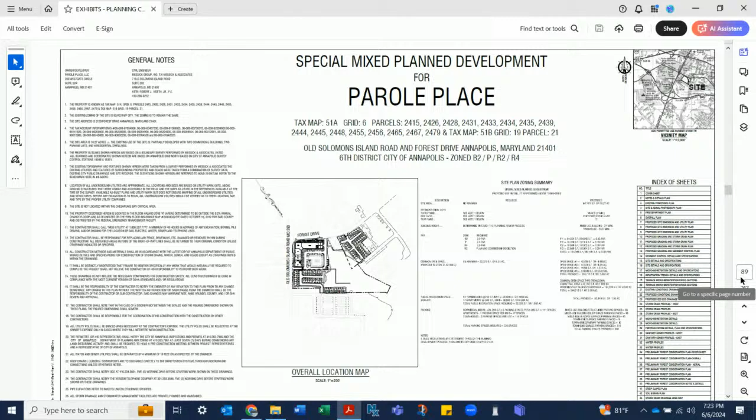I am. Okay, what we have up here is the cover sheet. Why don't you clarify for everyone the total acreage, what's being disturbed, what's left undisturbed, zoning and all of that. I brought some copies so I can read them because I can't read that.

All right, so total acreage of the site is 10.27 acres. We're saving a significant portion of that property. Open space will be over 5.6 acres. Recreation area will exceed the requirement. What's being saved is, one second...

There are 3.19 acres of forest conservation. In one area, there's a reforestation of 0.012 acres that will be saved. On the site, there are 73 existing significant trees. We're clearing 15 and saving the rest. The majority of the trees are either dead, in poor condition, or in fair condition. All the good trees are being saved.

And we'll get into this, but all of our forest conservation is on site, correct? That's correct. Okay, I'm sorry, I'm not hearing all of that. Could you repeat what you said?

There are 73 significant trees on the site. We're removing 15 — actually 14, I think. 14? Okay, 14. All of the trees being removed are either dead, in poor condition, or fair condition. All the good condition trees are being saved. Good? Okay.

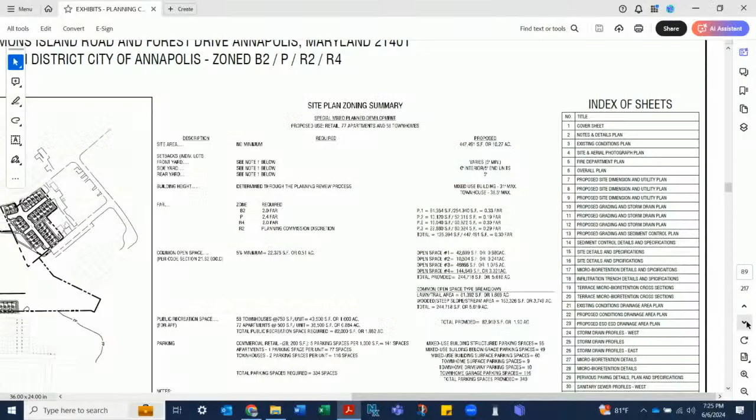I'm good. Can you jump to the aerial view? I think it's sheet 3 or 4. Yeah, there you go. Zoom out a little bit.

So this is an image we put together to show the context of the proposed uses and development on the existing aerial map. You'll see that in the center of the site there's a large blank area — that's the area being saved for forest conservation. That's also the area where we're doing the significant outfall improvement, which I'll get into in a minute.

I think I'm hard of hearing, could you just speak up a little bit? Yeah, thanks. That area is also where we're doing that significant outfall improvement you heard of earlier, but I'll get to the details of that in a minute. Got it, you said significant outfall improvement. Significant outfall improvements. Gotcha, yeah. Thank you.

On the corner of Forest Drive and Old Solomons Island Road, there's a 29,000 square foot commercial mixed-use building, with first floor retail and 77 apartments above it. Behind that, there's a parking court and a parking deck. There are also some areas in the back for gathering and entertainment, shown as hatched areas behind the commercial building.

South of that, along Old Solomons Island Road, we have townhouses fronting on a public street we're creating, which will connect Old Solomons Island Road to Neal Farm Drive as well as to Forest Drive. That's the area Mr. Hyatt is showing you now — townhouses located along a public street. The public street will end pretty much where Mr. Hyatt's cursor is, at the last end of the townhouses. The rest of the roadways on this property will be private, intended for access to the mixed-use facility.

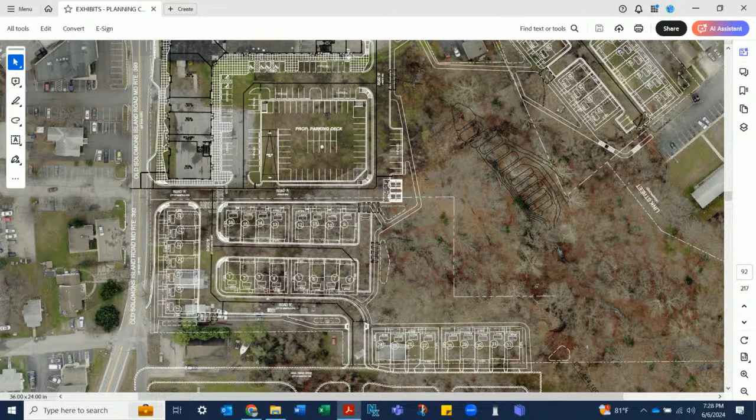On the other side of the stream, if you can move over, Stephen. You can see there's a separate entrance there off of Forest Drive with townhouse units. Those roads are all private.

If you look at the double lines running between the two, that's the pathway system you'll hear more about from Mr. Crabtree, which Mr. Hyatt spoke of earlier. A pretty significant pathway system, intended for pedestrian connection between the Allen Apartments, if we can get the right of way, the eastern side of the site, the western side, Forest Drive, Old Solomon's Island Road, and Neal Farm Drive—trying to interconnect all the communities with a pedestrian pathway.

Along Forest Drive, there's an existing storm drain right at our entrance that we're reconfiguring and rebuilding.

In essence, we're rebuilding that storm drain to drain Forest Drive, which will then drain down into the outfall improvement I discussed earlier. The outfall is right here—that's the step pool conveyance system. It's coming from Forest Drive.

Actually, it's collecting all the stormwater from the entire site as well as Forest Drive. We've designed this as really a regional facility. It's providing stormwater treatment not only for this site, but everything that drains to it, including the site between the east and west sections of this development, as well as everything that drains to Forest Drive. If you're familiar with Forest Drive, that's a low point, so all the commercial across the street drains to it too, and we're providing a significant improvement there.

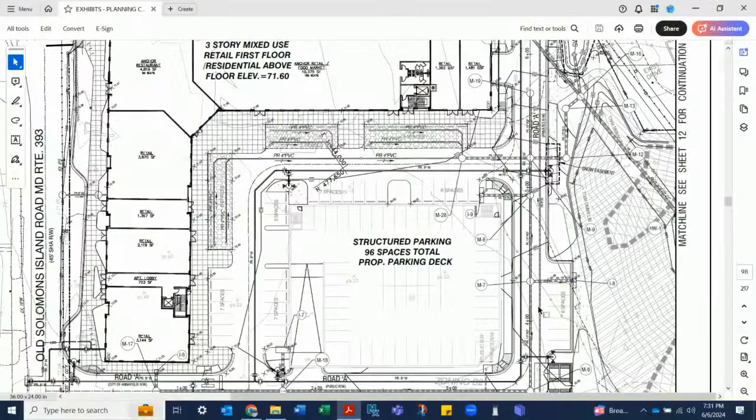Go to sheet 101. This sheet shows the step pool conveyance system better than the aerial did.

You can see the step pools coming down into the existing ravine. Today, where the outfall of that existing storm drain from Forest Drive dumps out, there's a significant head cut in this stream—right there, come down to the first pool. So right there today there's a significant head cut, which is erosion in the stream from the upland that drained through there. The storm drain itself is in somewhat disrepair, so we're replacing the entire system.

We've intentionally placed a large pool there to settle water and allow sediments to settle out. You can also see that the storm drain from the eastern part of the development comes into the same pool. From there, stormwater will convey down the hill through each pool, each pool being basically a 1-foot vertical drop with a stilling basin for each one. It's literally a babbling brook, if you will, when you get this thing finished.

The gray shaded area in the middle is what's called a cascade—that's a grade control structure, because we didn't have enough pools to make a 1-foot vertical difference from top to bottom without continuing to go down and disturb the wetlands, so we didn't want to do that. We put a grade control structure called a cascade, basically a 5-foot drop between two pools, filled with natural stone to allow the water to cascade down that hill. Again, each pool is a 1-foot vertical drop.

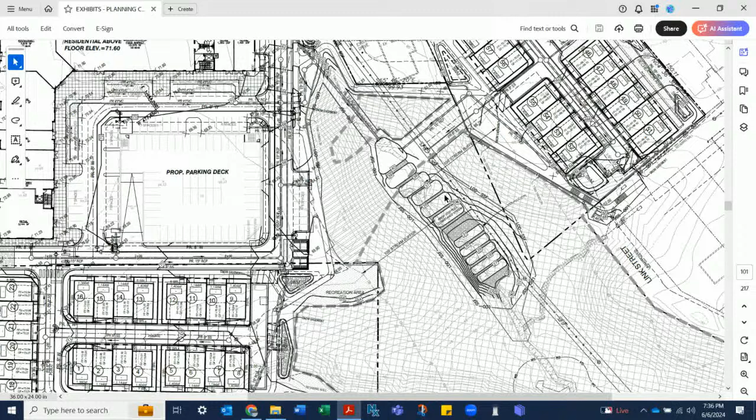Okay, so to continue with the stormwater management - that's the regional facility that's basically improving and stabilizing the outfall. Within the pods of the development itself, there are also micro-bioretention facilities scattered throughout to provide the environmental site design volume required by the state. So the ESD volume is completed up in the upland portion of the site, and the outfall improvement is down below. There's also an infiltration device behind the mixed-use building for roof leader infiltration to limit the amount of water that goes down to the stream.

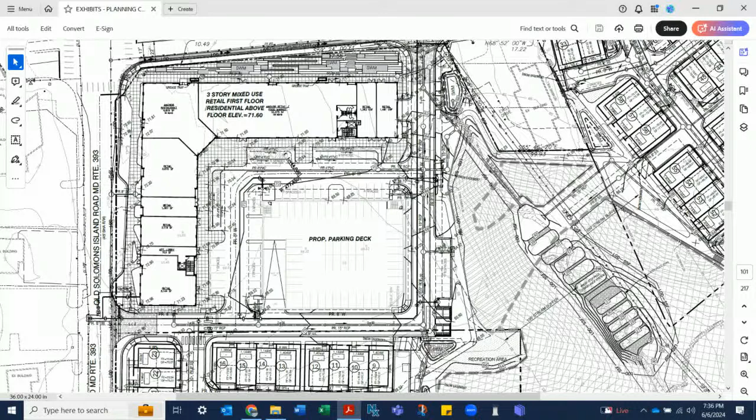I want to show the microbioretentions - I have those on the terrace as well. Also on the terrace, on the front - can you zoom in at all? Okay, that's the sheet I wanted. There you go. There's gray shaded areas on the front terrace, which is really an interesting feature, which I'm sure Mr. Wilson will get into. There are stormwater management devices there to treat roof runoff as well as patio runoff on the front of the building.

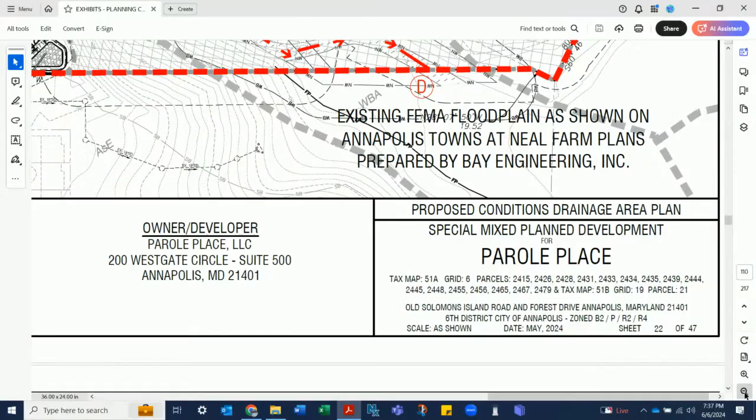Are they just bioretention ponds or planters filled with native species? There are several stormwater BMPs, and I'm wondering what kind - are they bioretention? So on the terrace, they're more like urban planters, yes, stormwater planters. The others are bioponds. There's also one infiltration device - after the water is cleaned and water quality is improved, it's put in the ground.

All right, so then I have the plat here. We still have - let's come back to the plat. Okay, what do you think about that? That's fine, okay.

Let's talk about the design generally. You've alluded to all of the stormwater - we've concentrated development along the corners here and the already developed areas, but can you verify that this design minimizes impacts to the property and that we've achieved, we'll call it, maximum natural resource protection?

It does. Can you go back to the aerial view? Sure. Which one was that? 98, 94?

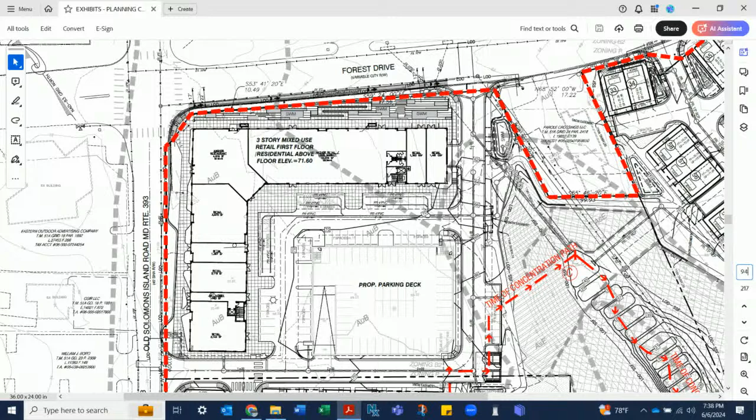Bear with me. That was... It's going to be earlier in the set. It's like sheet 4 of the set. There you go, right there.

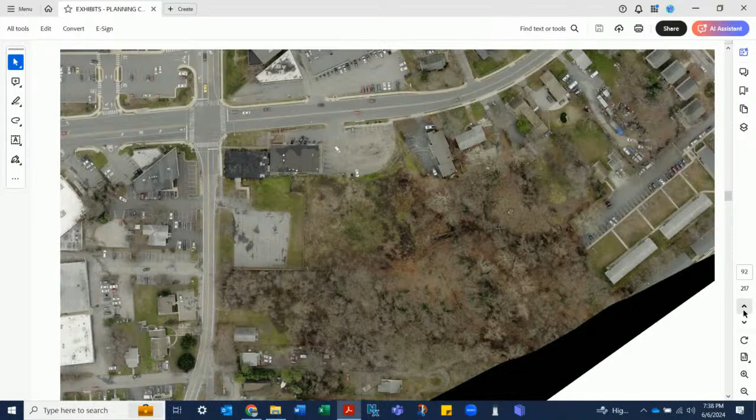So you can see on this photo that the areas with no white overlay are all preserved. In essence, all the steep slopes, all the stream buffers, all the stream areas, and the wetlands at the base of the hill have all been preserved.

Generally, to give you a synopsis of how we designed this facility, we took what was previously developed, what was clearly cleared, and worked within it as best we could. There's one small area at the fire T that was talked about earlier where we are pushing back the edge, but with the invasives over these past 7 years, that forest has pretty much died. The invasives have pulled it down.

In essence, we're working within what was previously at one time cleared, everything outside of steep slopes and outside of steep slope buffers. So all the treed area you see in the middle is all the steep slopes, stream buffers, wetlands, and everything else we've worked with.

That was created through a collaborative effort between us and the Office of Planning and Zoning, Tom Smith, through a number of meetings, as well as the meeting with you all back in 2022. So we think we've worked very well together to limit the amount of development that's intrusive into anything that would be considered an environmental benefit. And we think what we're providing with stormwater is a significant environmental benefit for the community.

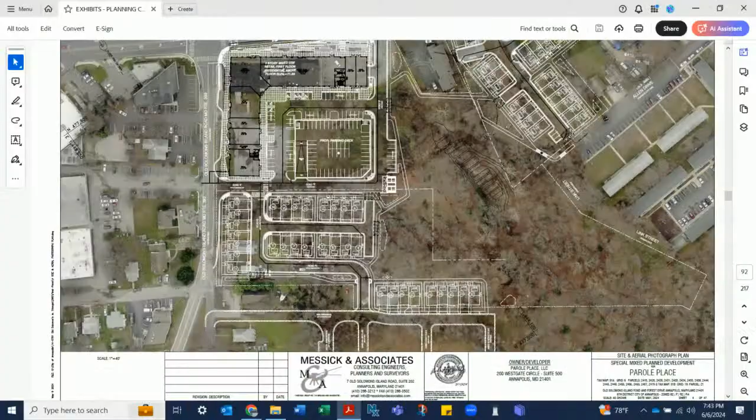Behind the mixed-use building, that large paver patio area would be used for gathering space and community events. We've talked about having events there as well. On the eastern pod, you can see the large area between the townhouses and the ravine - that would be community open space, as well as open space behind the townhouses. So we tried to intersperse community open space and open area for recreation throughout the development to make it convenient for the residents.

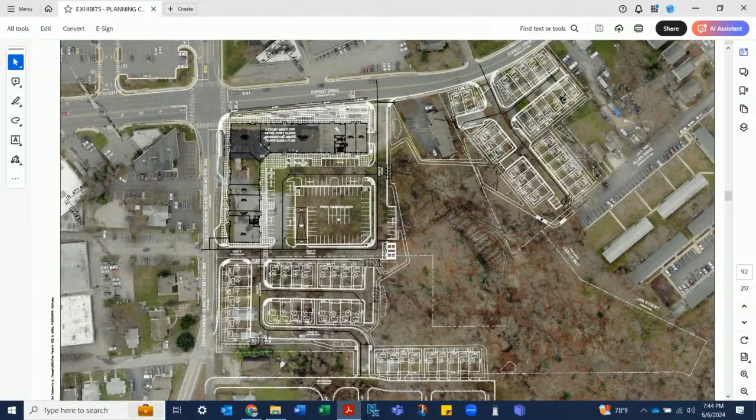So in your calculations for recreation open space, you don't use any of the forested area in that calculation? I remember reading that if you include that, you way exceed it. But the part in your calculation that's actually usable for people to sit and walk their dogs or do whatever - that space alone meets the requirement for APF. It does, that's correct. Yeah, anything that's in the recreational space is actually usable space.

So it doesn't exceed the slope or anything like that. You can go throw a Frisbee, kick a ball, have a picnic - that's the kind of space we're providing.

Could you say that again? I couldn't hear the end of that. The recreational space isn't going to be sloped - it's all usable. None of it is sloped in a way that you couldn't actually use it. You could sit there and kick a ball, throw a Frisbee, or have a picnic if you wanted to.

So, and it's not in the conservation easement? That's correct. None of it is, no.

Let's talk about trees. We're going to remove a few, as you mentioned, and we'll get into the specifics on that with Mr. Klobasco and Mr. Arison in a bit. But let's talk about the number of trees, the locations, and also street trees - we've got quite a few of those.

Go to the next page. So the dots on the page are obviously the trees. Green means good tree, yellow means fair tree, red means dead or dying or poor. You can see where they're dispersed throughout the community.

As I testified earlier, the ones that are coming out are either yellow or red. That was intentional, to save the good trees as well as the environmental areas around them. So the 14 trees that we're removing are the ones you see within the development area that are either yellow or red - that are shown on that plan.

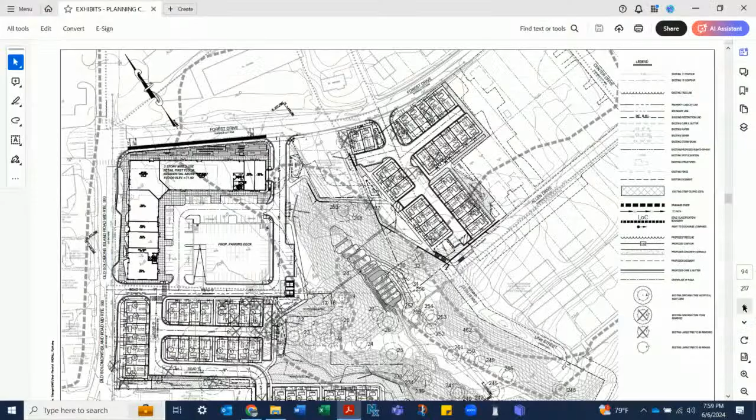The existing intersection conditions for Old Solomons Island Road and Forest Drive—go to that page to show that somewhere—currently does not operate at acceptable levels of service. Could you say it again? It currently does not operate at acceptable levels of service. So therefore, obviously, anything you add to it doesn't help it.

So there's a mitigation proposal that's been approved to restripe the intersection and do signal timing improvements to bring that intersection back up to a level of service D as required by the code. Could you point out where that is on this map? Sure, this is the intersection right here.

So you're going to bring it up to a D level by adding stripes? Correct. On Old Solomons Island Road, there's enough room today for 2 lanes, but it's not striped as such. So we're going to widen and restripe it to allow a right-through lane and a left turn lane. And we're going to adjust signal timing to stop the delay—there's a significant delay on one of the legs. That'll bring it back up to level of service D.

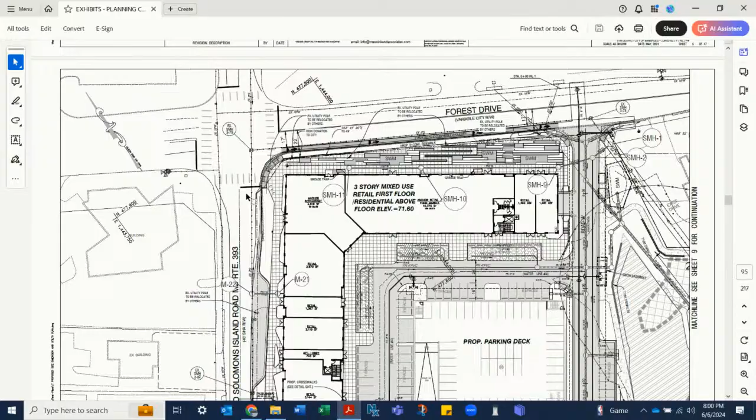Is that a modern traffic light with Synchro cameras that can alter the timing, or is it? It does have cameras, and I'm not the traffic signal designer, so I can't tell you if it's modern or not, but it does have cameras. I drive through it every day.

Okay. Let's talk about roadway improvements. Jump to that slide—131. Is that the right one? That'll work, I'll go down. We went over roadway improvements—what are we doing, what's our plan here?

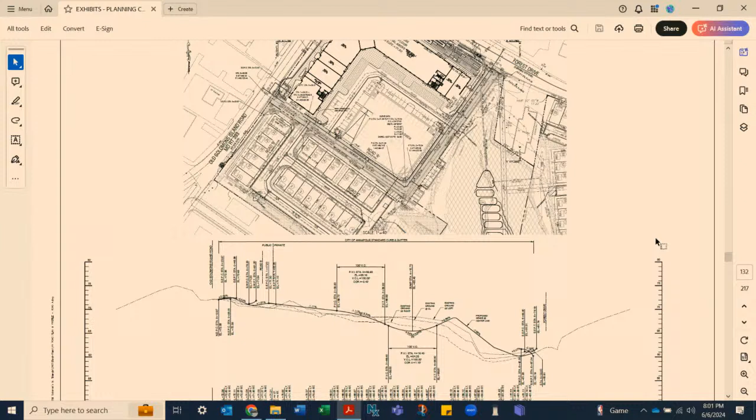Can you zoom in on the commercial piece? As I discussed, we're doing a little restriping at the corner for the intersection. We're also doing pull-offs and extra decel lanes into the site along Old Solomons Island Road and further south, and minor widening along Forest Drive again for decel. The most important feature is incorporating the pedestrian pathway that pulls traffic off the intersection, allowing people to walk without cars and connect to the bus routes, so interconnectivity is important. As far as rights-of-way connecting to Forest Drive and Old Solomons Island Road, you can see that, as well as the connection to Neil Farm Drive.

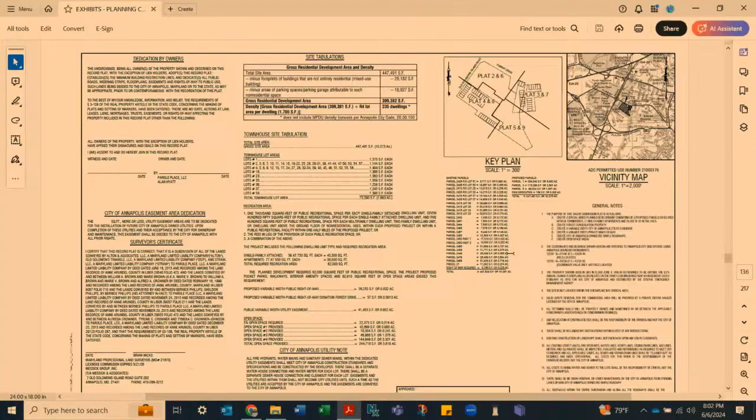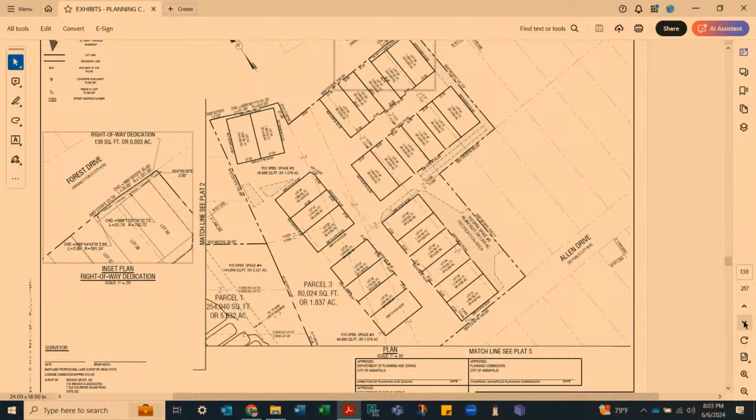Okay, let's jump back to the plat here. Can you confirm that the preparation of the preliminary subdivision plat meets standards of Title 20? I can. The standard requires a plat to show boundaries, easements, rights-of-way, lots, setbacks, and metes and bounds—it does show that. It also shows the existing parcels being combined; there were 17 existing parcels turned into these lots. It shows the combination and re-subdivision into the lots, and the open space areas. It also shows the private rights-of-way on this page, and the public rights-of-way on the west side of the property. And this area is the recreation space—you can see it's hashed in a few places, but it's on the plat as well. So there are some spaces here and here.

It doesn't show trees, so is it just open space with no trees? The plat isn't intended to show trees—the site plan shows the trees. Right, I'm just asking, I can't tell from this, is that an area of just open space? It'll be a mix of plantings, grasses, and trees.

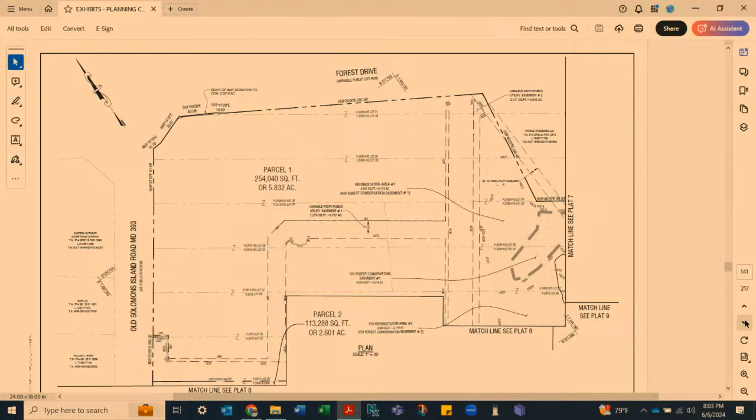Okay, so with respect to setbacks and the rest of the bulk regulations, the special mixed planned development and the associated MPDU programs have some relief on these standards. Have you asked for any use of that relief anywhere? I don't think we did, did we? No, I think everything is to code—I don't think we had relief needed for any of the setbacks or anything like that. Okay, that was what I saw, but I wanted to ask to make sure. No, did we? No, you're not. No.

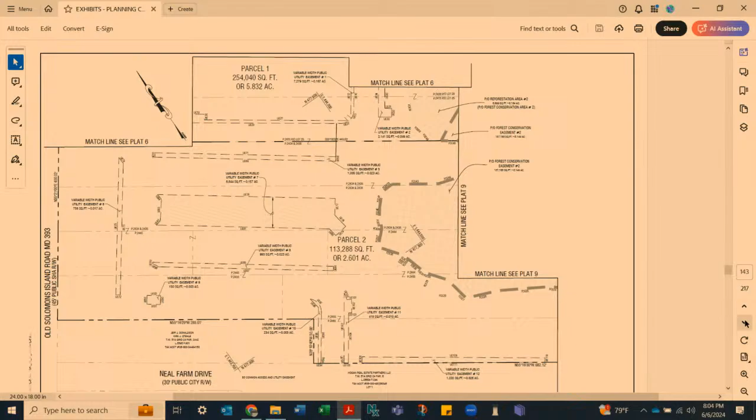One more time, other than the variances for the trees, everything's to code—setbacks, height requirements, yep. You went at great length to talk about FAR, and you're way below what's required in any of the districts. But I just wanted to make sure you didn't have to take advantage of any relief available under those two programs. As for the plan development advantages and why it made sense here, I think Mr. Harrison will be able to tell you why. It worked out really well here.

Mr. Newton, for the record, can you confirm that the project meets all the applicable code standards for plan developments and site design plan review, the general design standards, the additional standards for B2 zones since the corner is B2, and the subdivision preliminary plat standards? I do.

That's all I have for Mr. Newton, and we'll keep him here for questions. I was curious about the MPDUs, moderately priced dwelling units. I think in the last version you were going above and beyond the bare minimum requirements for MPDUs, is that right? We're providing what was on the books when we submitted in 2017.

So I think it's 12% for sale and 6% for rentals. So 12% of the 135, or well, that'd be if they were for sale, and 6% if they're rentals. And the apartments are definitely going to be rentals, and we're undecided on the townhouses.

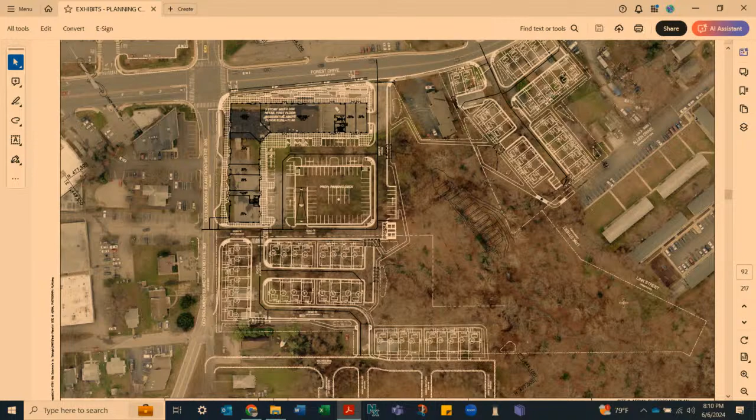And we're compatible with the surrounding neighborhood and consistent with the city's comp plan? Well, let's start with the comp plan. It's consistent with the 2009 comp plan. With some reluctance, I'll say it's consistent with the Upper West Street plan and with the 2040 plan. I say with some reluctance because the 2009 plan is the governing plan right now, it's the plan of record.

And it is compatible with the neighborhood. As a matter of fact, a project like this begins to set the standard for projects that come after it. If you look at 1901 West and all the controversy that surrounded that back in the day, you'll see that other projects coming in now are using the same sidewalk treatment and a lot of other things that were established for that section of West Street.

And this project does transition from commercial, higher commercial towards Route 2, back to the single-family Parole neighborhood. I'll also say that it's been under consideration for around 7 years to ensure there was neighborhood input and the highest quality project.

What we've proposed here, this plan development, approval of it won't result in any greater adverse impacts to the surrounding area compared to development that might otherwise be permitted if we didn't go through the plan development process. Special mixed development allows a whole bunch of uses, but most of the uses proposed in this particular project are already permitted in the various zoning districts that exist on site. They're providing additional connections and environmental work, so it would not have any greater impact on the neighborhood than if it was developed as a by-right development.

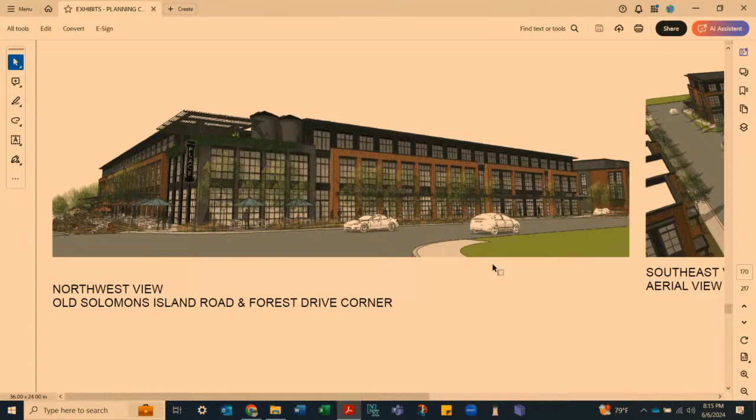So what we have here is kind of a transitional site, as Mr. Harrison described. What we tried to pick up in this location were cues from different sources that are interesting to us. We worked with Tom Smith at Planning and Zoning for several years on different iterations.

This is the corner of the development, and you can see that the corner is highlighted with a higher percentage of glass to solid wall to try and open that corner up and create a sense of place for this location. The building changes as it moves away from the corner with the introduction of masonry elements that start to set a rhythm for the building.

You can see it's not continuous on both sides. It goes and stops and starts. The intent was to create layering in the facade to add interest to the building and give it its own character that relies on some reference to architectural elements you might see in an urban environment, with some reinterpretation of those pieces.

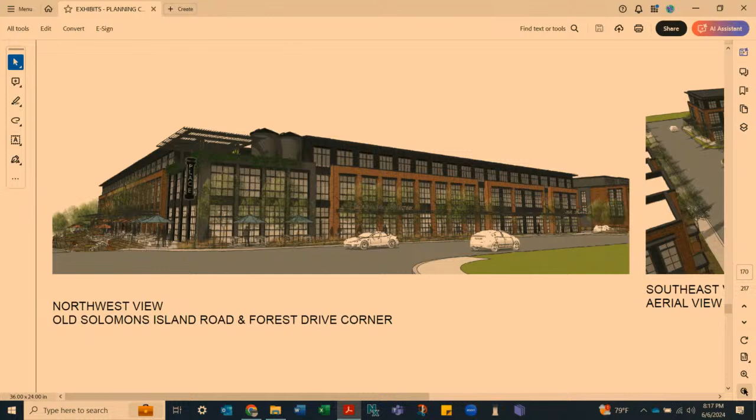You have to keep in mind that there's quite a bit of grade that goes around this building, so it changes dramatically from this corner to the interior space. We followed the street lines as much as made sense to us, and where we are not able to follow the street lines, we've created some exterior spaces that Jordan will talk about in just a few minutes.

I have a quick question, Leo. Mr. Wilson asked: in that picture we were looking at just a moment ago, are those cisterns on top of the building? They're devices that we're hoping to capture rainwater in and then use to water the landscape on the property, rather than a conventional system with rain barrels, which is too cumbersome to maintain. So we think we can do it with those on the roof. Thank you, I think it's a great feature.

Yeah, don't take this as criticism, because I don't mean it this way, because I like it. I think it's aesthetically pleasing, but has sort of a New England mill feeling to the building. I mean, I like it. I'm just curious where the inspiration came from.

There's a lot of pieces that went into the creation of the vocabulary and the general sense of this building. You have the downtown of Annapolis, which is very traditional, very small scale. And then as you move into the county, the character has changed dramatically with the development of some of the pieces that we see out there. So this is intended to transition from what's happening in the county, which is much larger scale, to what's happening in the city.

The references we used picked up an industrial piece, which a lot of the perimeter of Annapolis still contains pieces of. So you'll see at the top there, these are some buildings that we looked at. There's Remington Row and some other buildings that we liked.

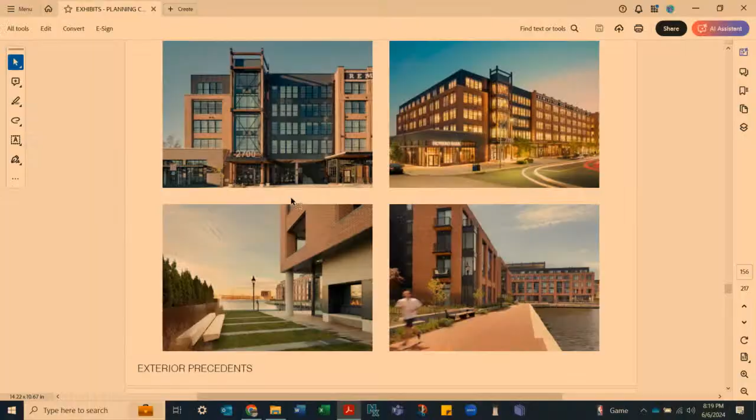I like the mix of a little bit of more constructive architecture that you see in the upper right, and also the layering that you see in the lower upper left and lower right. So those were the kinds of things we were thinking about.

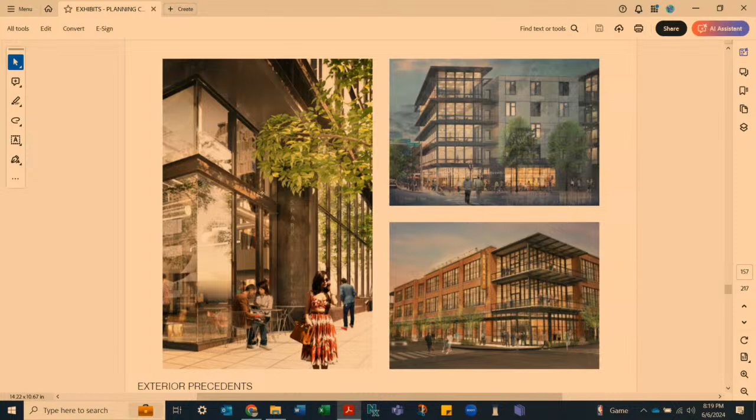And then when you think about layering the traditional pieces with contemporary elements, like the corner in the lower right image, we thought that mix starts to say we're not trying to be a traditional historic structure. We're trying to describe a new approach to how this is done, and we think this is just the right corner for it.

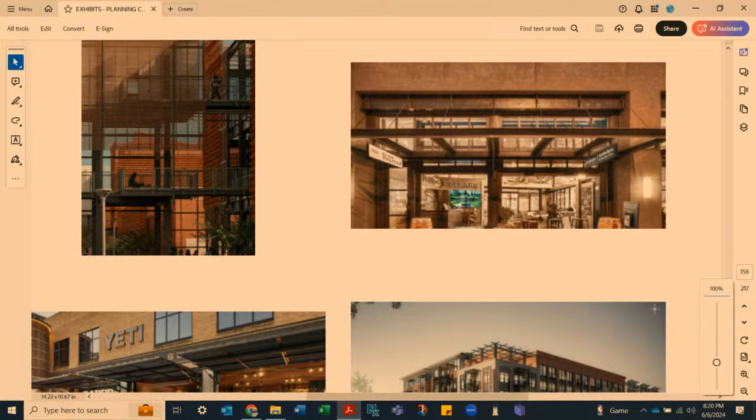In this image, you can see on the upper right there's door assemblies that are intended to tilt open for our retail space, and I'll talk more about that when we look at the plan. Again, the mix of traditional masonry and some more iron elements we think works well. So these were the things we were looking at.

Now, one of the things you need to know about the project is the first floor retail space. We've got a vision of that space as a gathering place for not only the people who live here, but the people in the larger Annapolis community. These doors are intended to open up to plazas on the inside and the outside of that L. Our hope is that we can work with other members of our group to get more of a gathering, almost like the market houses downtown, but at a larger scale.

You'll see that in other larger communities, but we just don't have it here in Annapolis yet. So gathering space is a big part of what we're trying to create here.

Speaking of the retail space, one of the things I see is that there are a number of first floor, quite small retail spaces, close to 1,000 square feet, which is awesome. For the larger retail spaces, do you think those could be sectioned to make smaller scale spaces, local businesses who don't need a large space, that is flexible like that?

We do. Can we go to the plan? Can you pick that up? We talked about that kind of thing in one of the prior work sessions. We did, and we took it to heart.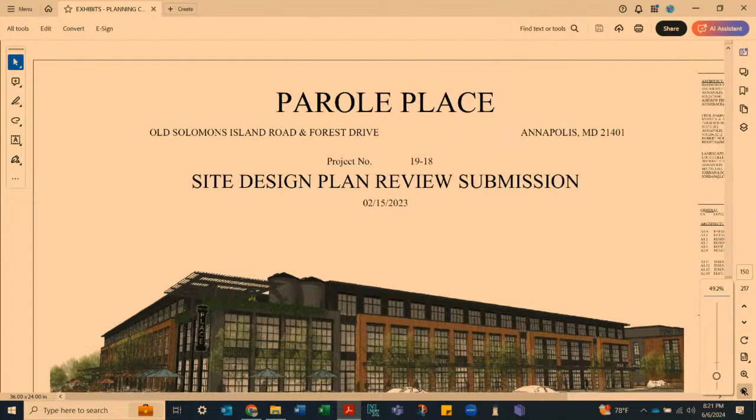You'll see when you think about those elevations, how the bays are set up in modules that we think would support subdivision of the interior space. So here's our first floor plan.

Go back to that one for a second, and you'll see we're showing that large market area along the top of that page. That enters into the outdoor plaza that Jordan will talk about in just a little bit. It's really exciting, I think it's going to be a great outdoor space for adults and kids. The backside also has that. You can see the corner is kind of a larger single space. We're hoping maybe we could get a specialty restaurant to take that.

Then you'll see along the bar to the left, we just kind of divided it up to illustrate that there's some flexibility there. You'll see a smaller one that goes right through from the street back to our court, and then other ones. All of these are intended to be split up as the tenancy dictates for us.

So let's go back to the 3D images, and then we'll run through those. I don't want to take a ton of time because we've been through this before, but I do want to make sure we cover some things that are important.

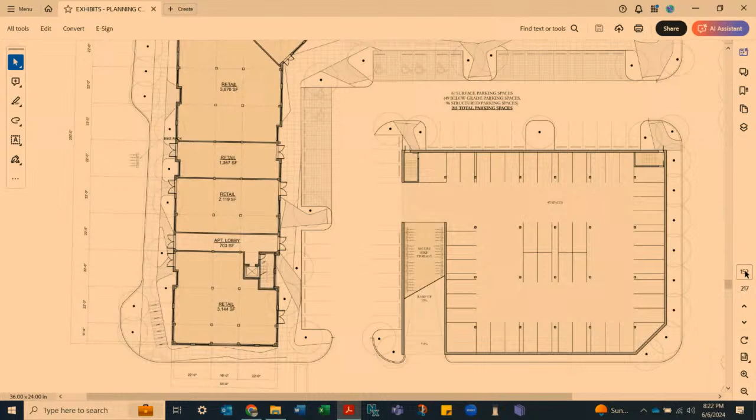One thing you'll see there, just go back that one for a second. Go back to... no, you can continue. Let's go back to 3Ds. We'll talk about that in a minute. So we have these two. Which one do you want?

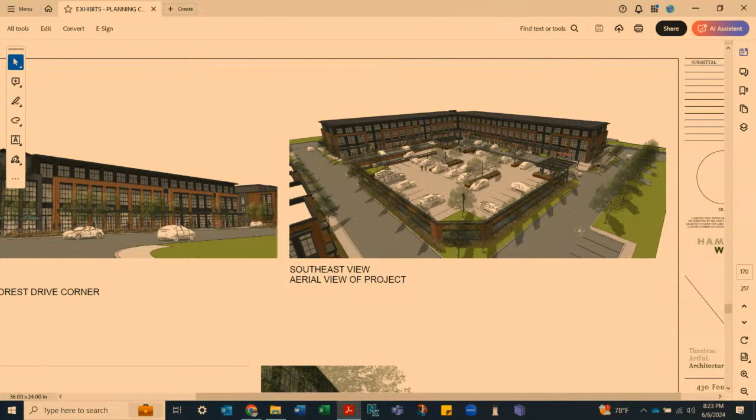Well, the elevations are hard to read. It's the perspective images. These? Yeah, so let's go to the one that's off to the right on the top there. Can you zoom in on that a little bit? So the challenge for development in Annapolis, and this speaks to the comment we heard earlier from one of the commissioners, is what do you do with the cars?

So we did 3 different things with the cars. For the townhouses, we parked them either in driveways or under the buildings. The majority are on the first floor, and you'll see those plans in a minute. We looked at a larger parking structure, but I think once you get over 2 stories, it feels like a parking garage. I think the 1 story with rooftop parking is a much more elegant solution where it doesn't feel like it's overwhelming the adjacent development.

Yeah, I'm glad you didn't go full on Texas donut. One thing on the parking garage, it was a very particular item that the community did not want. There was a lot of safety concerns about having a multi-story closed garage, so we heard those concerns and went back to the drawing board and came up with a parking deck. So it really is open on all sides, and it'll be well lit and as secure as a parking structure can be.

So I think if you are going to do any solar, above the roof a la Hillman seems to be the way to go. Yeah, plus keep the heat off the sun pavement too. Yeah, there's 1 level at grade and 1 above. Right, so it's structured parking, it's just that it's 2 levels. That's correct.

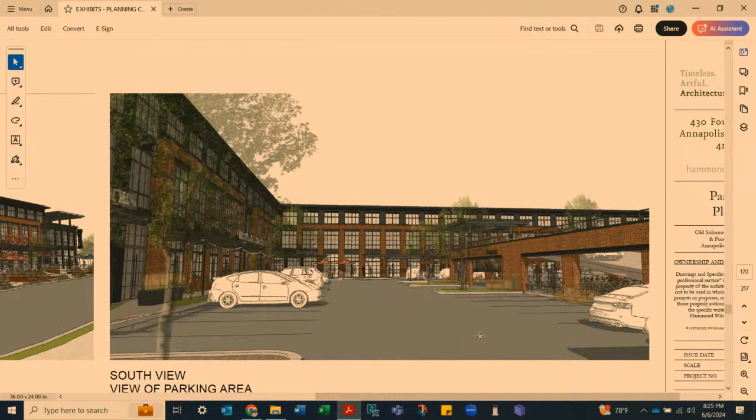So this is from the public way as we go down Forest Drive, I believe. Here you can see where that grade goes from the corner and drops down pretty quick. So we've created this interstitial space between the building and the roadway that does three different things.

The upper terrace opens the building to the space within—there's a high terrace that you could have dining or whatever you wanted. Then there's this step element, which Jordan will talk about, that combines other uses including gathering space, stormwater elements, and plantings. We think this is a nice way to avoid a real tall building sitting on the corner, and it provides a unique sense of place.

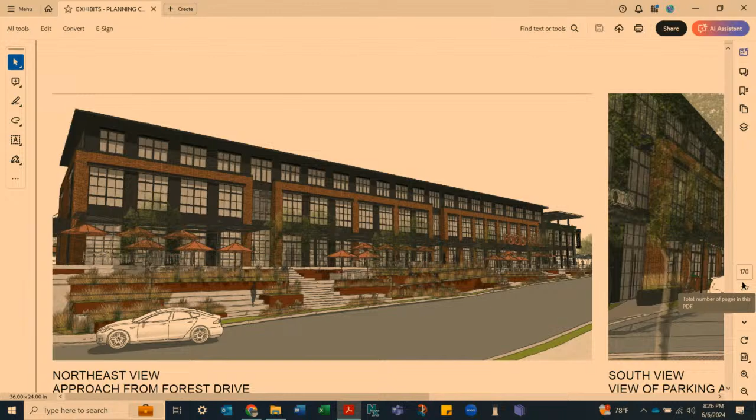Quieter off the street too. We think so—it'll be quieter. Let's slide this over 10 feet to the side.

We already saw that one, okay. So I think that covers those.

Question: are you going to talk about what's in the parking under the first floor—is it just all stalls? No. I was going to go back to that, but you can barely see it here—can you zoom in? If you go to somewhere like Amsterdam, you'll see in these parking decks there's a lot of storage under there for bikes. So I've got room for at least 40 to 50 bikes down there.

We think that if the city continues on the path we're all hoping it does, biking will start to take a higher place in the pecking order of transportation. So we're thinking ahead and think it's a really good spot to do that. We've given up some parking, but we can meet the requirements, and I think that's a nice way to use that space.

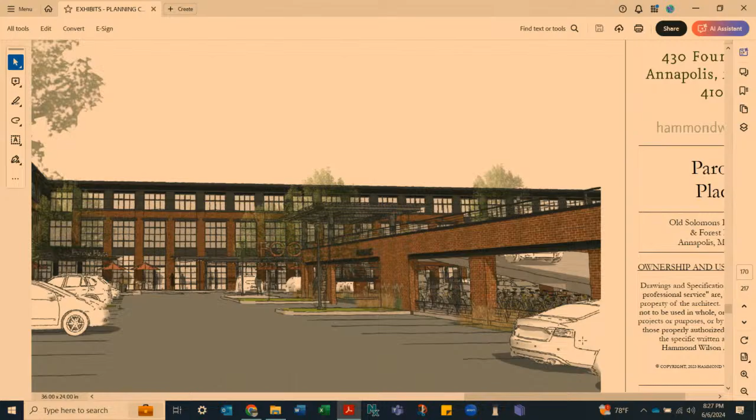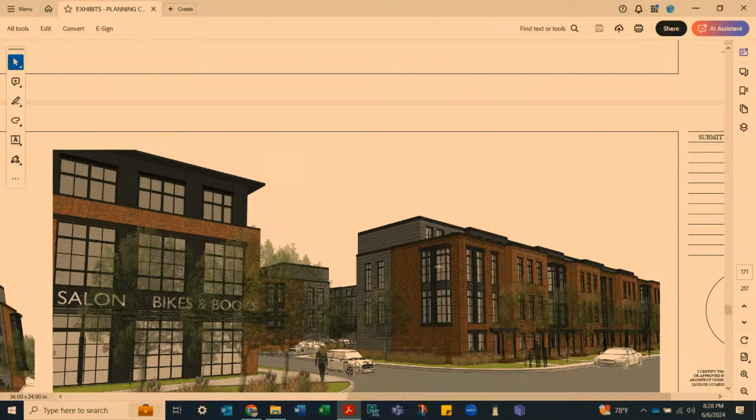So let's go to our next ones. This is an interesting slide to me because it shows the corner where the commercial building and the entry sit next to the first row of townhouses. We changed the mix of materials to go more towards the townhouse type imagery we're used to seeing in some of the more successful ones in Annapolis and elsewhere. Again, these will be more vertical because they're townhouses.

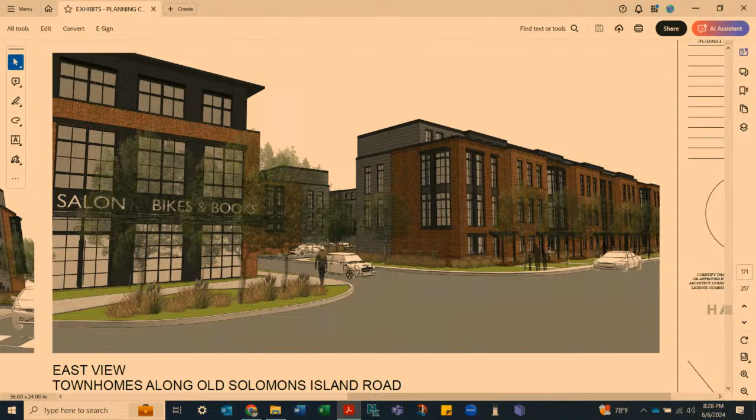One of the things we were asked to do is reduce the size of the upper floor, so we made it only half the size of the unit below. There'll be a bedroom up there and then a walkout to a rooftop deck—we've seen that in other places in Annapolis, and it's been successful.

This isn't my favorite slide because it needs more development, but it gives you a sense of the scale—these are 3-story units with a cap on top, with parking underneath. Then you start to develop street elements not dissimilar from what we have on West Street, which has been so successful, with the exception that these are set back from the street quite a bit since they're not as hard up against the sidewalk. I think that works better in this location. This one really gives you a better sense of the overall mix of what's happening there.

You've got a lot of green space, parking elements under the towns, and undulating facades with different materials for each one. I'm pretty excited about how that's coming together. Finally, in the distance, you can see the corner building which anchors the property.

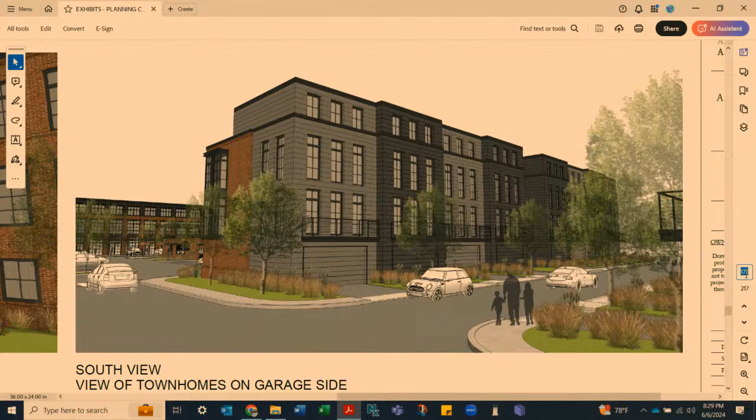What's the square footage of the townhouses? The townhouses are a bit larger. I think they're set up as 3 bedrooms with the parking inside. I'm not sure I can answer that question without making it up, so maybe I should tell you that next time we're together. And what are they, 4 stories? So will they stand taller than the mixed-use building?

They're the same height. It still has that setback in the front. You want to go to the plans for the town so we can show you, and then you can make a better guess. There's floor plans for the towns in the set.

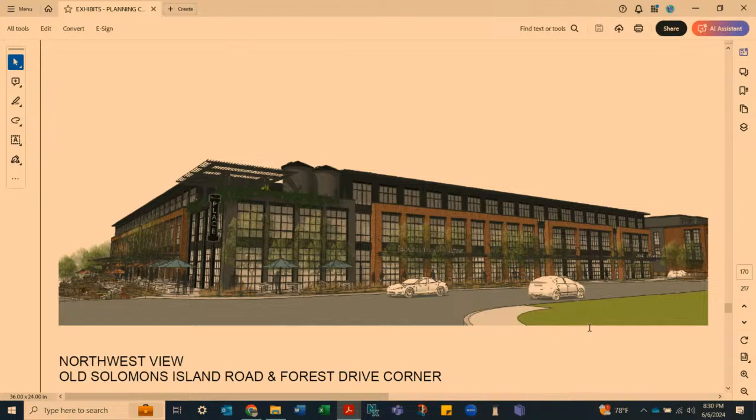Yeah, there's the height. Again, not dissimilar from what we see downtown, but I think I have a floor plan in here too. Yeah, oh yeah, keep going up. Great, so here's your main floor, you can actually go up one more slide. There you go. So that's the one I want, yeah.

So here you can see on the ground level, there's parking for 2 cars. You come into the vestibule space. There's a den on the first floor, and then a stairway that takes you up. One of the things that came up in our prior meetings is we eliminated the runs of 9 and 10 units and went to runs of 4 and 5 and created pedestrian walkways between them to green them up a little bit. I think that was Commissioner Waldman's suggestion.

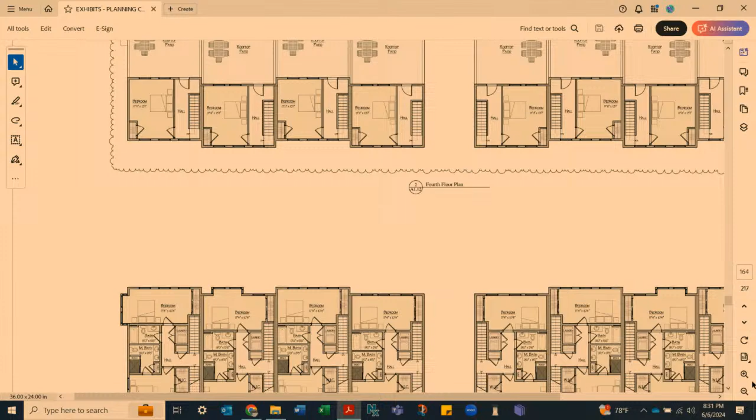These look to be at like 2,200 square feet, not including the garage space. That sounds about right. And then the main floor here, you can see you come up and there's open living, dining and kitchen space, and balconies on the street side. And then finally there's 2 other floors on the next sheet. Yeah, so here you can see the bedroom level with 2 bedrooms, then finally a bedroom or den on the upper floor with a balcony space to create some outdoor space for the townhouses, which again, this is all stuff that's been tried and true.

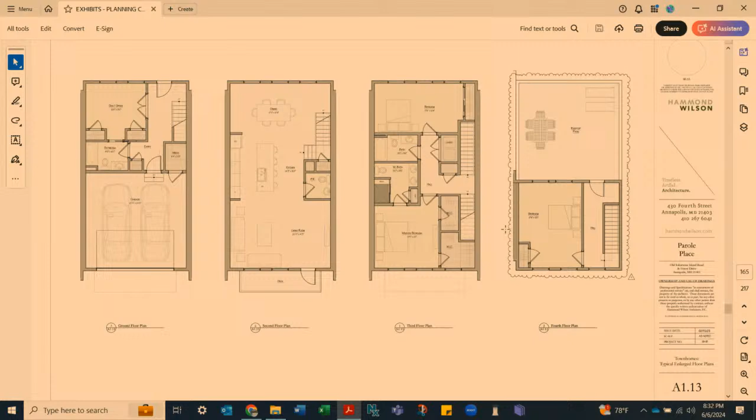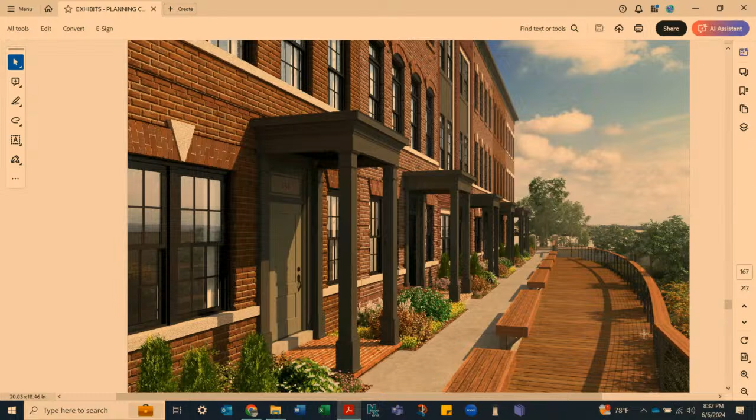If we go to the imagery just below these in the slide deck, there are places in this planned mixed-use development where the front of the unit does not face a roadway. It faces that kind of green area that goes through the center that Wayne described to you. Working with Mr. Smith, we decided that we would try and use those to create another sense of place there with these combination boardwalk and concrete walkways that'll look into that space. So while it doesn't front a traditional street, we think it creates a nice walkway area that Mr. Crabtree will talk about.

Next one. I'm almost done, but I just want to hit through a couple of these. Do I have any more of those in there? Yeah, that's just an ancillary image. I think that kind of gives you an idea, but I thought I had a few in here that showed some of the other precedent images in there. Can you see that on your deck? Yeah.

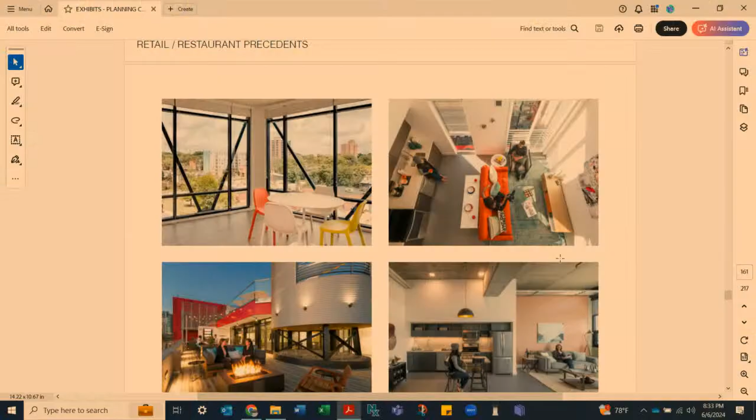Keep going. They're probably in a different area, in your handouts, but you'll see what we were basing these on again are some of the products we've seen like on West Street. We think a lot of that stuff starts to work really well. They seem to be, the market seems to enjoy those, and we think the scale of them is appropriate to provide additional housing.

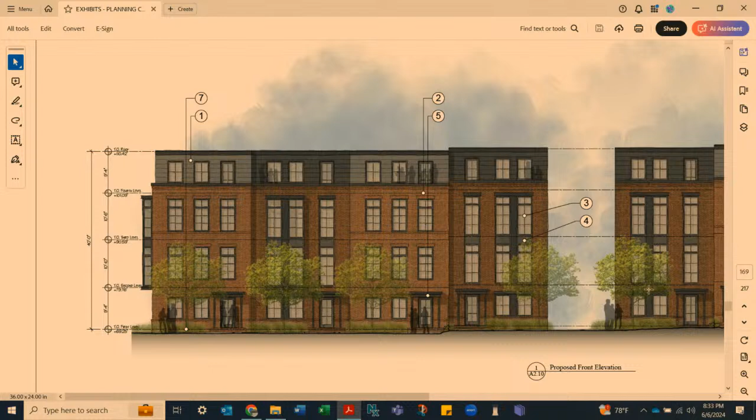So is it appropriate for this area? We think so. Is it compatible? We think so. Does it provide compliance with some of the requirements for special mixed planned development in terms of scale, mass, proportion? Yes, the answer is yes, that we worked hard with city staff to come up with solutions that meet all of those requirements detailed in the staff report that the city's provided for you. So I think that's everything, unless you wanted to ask me more specific questions.

I think that's it, but one thing, the different materials, we're showing some brick, but what are some of the other materials that we're going to be using?

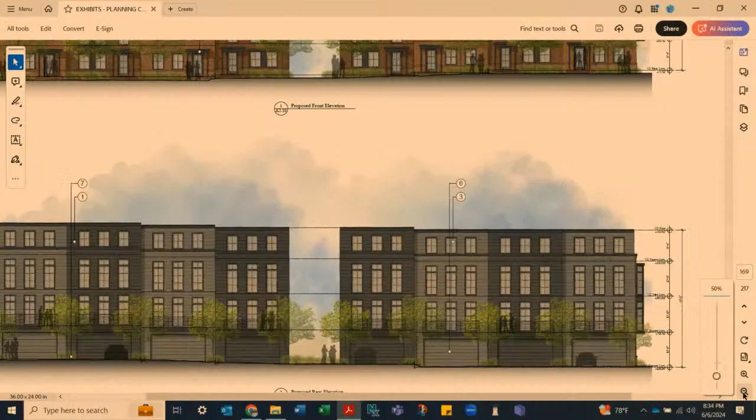Yeah, that's a good question. I like the brick because it's Annapolis, so it's hard to get away from that in my mind. But I also like the more contemporary nature of the panelized assemblies. The windows are a little larger than what you'd see traditionally, so there's a lot of glazing. On the back side it'll be a cementitious siding that's panelized, available from several manufacturers. Then there's a metal component used for the handrails, balconies, and window frames. The combination of those three things starts to lend itself with traditional reference combined with contemporary components.

And in your professional opinion, the project incorporates high-quality architectural design and meets all of the code standards? We believe that it does, yes.

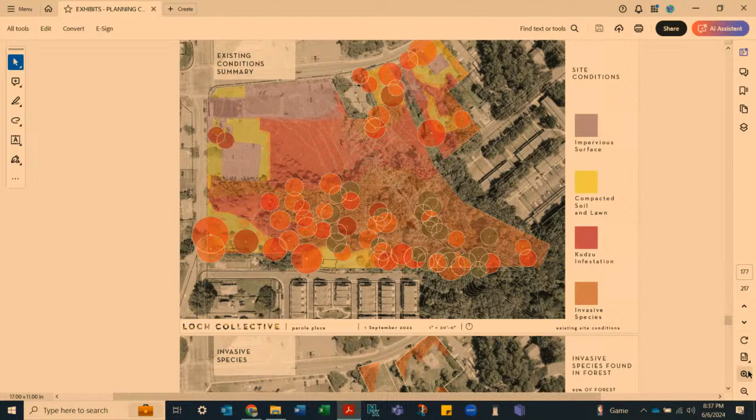I think I mentioned this in my opening. Jordan was involved in our presentation to all of you back in September of '22, and we showed you a lot of the existing invasives, and we pulled an image from that presentation. I'll let Jordan elaborate on it, but it's in your supplement that I handed out earlier.

Yes, this was the compilation of all of our studies we had done, at our conceptual level. We were looking at the whole site, kind of every square foot, and looking at different things like impervious surface, where there's compacted soil for whatever reason, kind of non-contributing lawn. The kudzu infestation was large enough that it warranted its own designation, and then the invasive forest. We had a color grading scale similar to what you guys just saw on the tree report, and we had some smaller trees included as well.

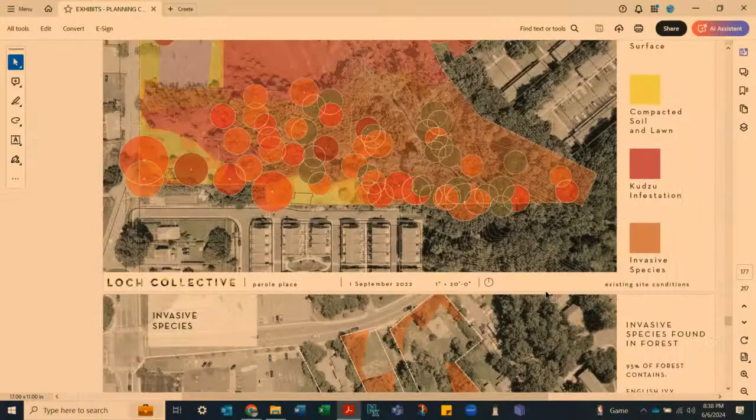Did you say invasive trees or invasive species? Invasive species, yeah, I mean there are invasive trees on the site as well. So kind of the way that you see this all together, the kudzu, everything's blending a little bit in this image, but the red, those are the invasive species. The area that looks like lawn to the north, that's actually just a kudzu field where it's taken over the trees, and there's now just kind of totem poles of what was a tree. That's kind of where the forest would be headed if something doesn't happen.

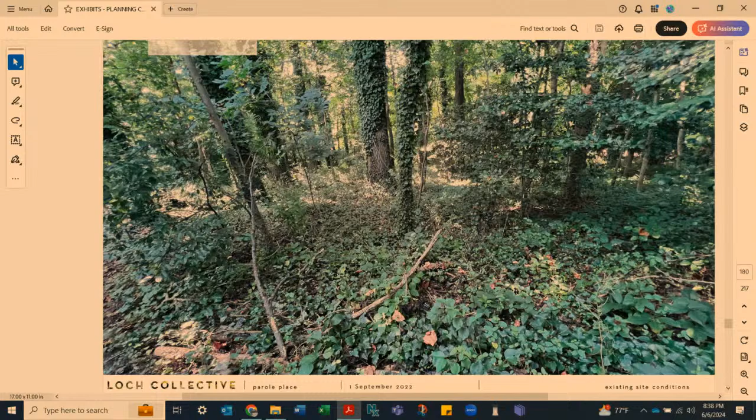Within the forest, Mike Lasco can speak a little bit more specifically, but words have been used to describe it as a trash forest, a non-contributing forest, a dead forest. So there's really no native, natural forest cover or ground cover. Invasives are taking off, non-contributing species are taking off, which on the larger scale leads to not native, unhappy animals, bugs, all the things that start to build. So really this entire site sadly is kind of dead in that way. We're not able to—there's still squirrels and animals—but really there's nothing to create the natural environment that we would hope for. And given its location, being this kind of headwater site and where the water's flowing, it really can be a point source, we think.

It can be what? Kind of a point source. Like right now, it's almost this negative—we've got this kudzu valley that could just keep going, they could just take over. And it's not just this site, it's other sites that have it. But we're hoping to reverse that and create a native site that can then start to spread out throughout the contributing neighboring sites. And I would say this is great to talk about right now, because when we talk about the maintenance program, we're going to have to talk about how to maintain what you're trying to deliver here, which is going to be a beautiful site.

So the invasive species maintenance will be important. Right now we're seeing a lot of developments don't have that, and that's why they're getting overrun with invasives.

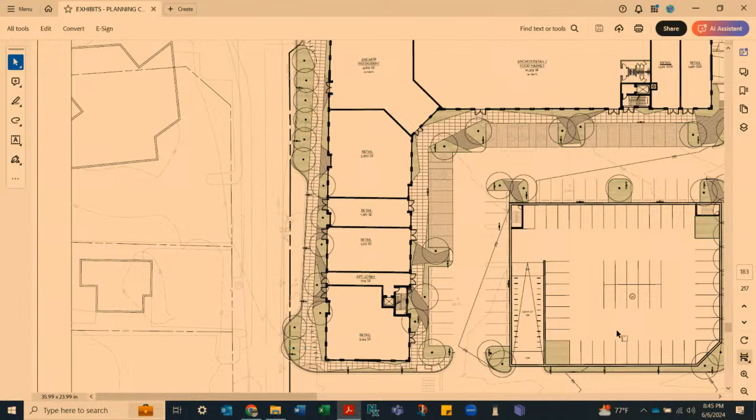So there's flexibility - clearly Gavin hasn't seen this, right? And then going around to Old Solomon's, we've created pretty generous walkways. We're going above and beyond on the distances in all of the areas, so that if cyclists are getting off their bikes, we have various areas of bike racks for people who are just coming quickly and aren't going to park under the garage, and giving generous enough space to be able to walk the bikes on the site.

And you can see all of those street trees that are wrapping around - those are interconnected planting beds, so we're giving them their best chance, much more than just these kind of small bays. So some of the design is aesthetic, that we have these flowing paths and flowing planting beds, but it's also very practical as well in that sense.

Are those street trees set back a little bit from the power lines? Because there are power lines on both streets. So are the ones on Old Solomon's Island set back enough that they're not going to grow up into the power lines? Yeah, and you can see, towards the corner, how we really pulled those trees back in, and that's part of that accommodation. Is that dotted line the power line, or maybe the property line? That's the darker bold one is the property line, but it is, to my best knowledge, close to there.

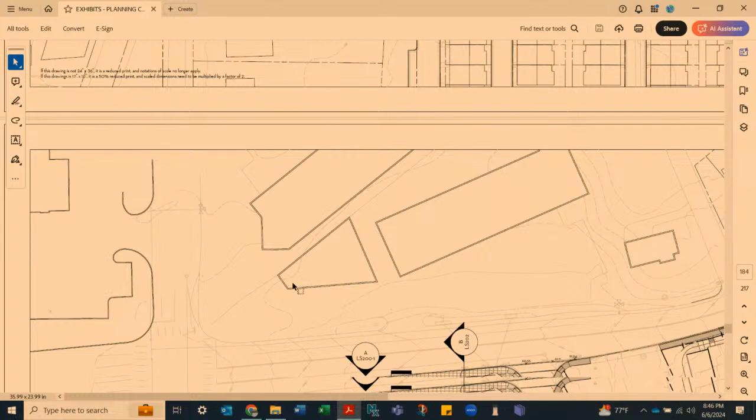Okay, looking at this - not sure if it's on here or not. Yeah, I'm not sure where the power lines are.

And then if we move back closer to some of the recreation areas, going into the townhomes, we've created a lot of these nooks. So there's this bordering area where there's an open lawn - most people would think of it as a dog run - easily accessible to this cluster of townhomes.

But we've nestled a lot of these into the homes throughout the site, and then going over towards the edge of the forest is where we really wanted to bring people to gather, whether they're from the townhomes or just going on a walk from the retail. So these biomorphic shaped lawns, as we call them, are actually following the grade - we're working with the slopes, staying out of the steep slopes, but getting people as close as possible to look over into the forest.

Stephen and I specifically have hiked into there a few times, and it is rather precarious, but when you get to these flat spots, you really look into the canopy and have a dramatic view down into the ravine. So giving that opportunity, you can see the matrix of the trees - the reforestation that we're working into the existing trees - getting to reestablish that.

And so these become opportunities. Right now we're showing them as open space, so that's a place for what we call passive recreation. We haven't gotten into programming as far as something as specific as play equipment, but there's more than enough space for those here, and those hug this trail.

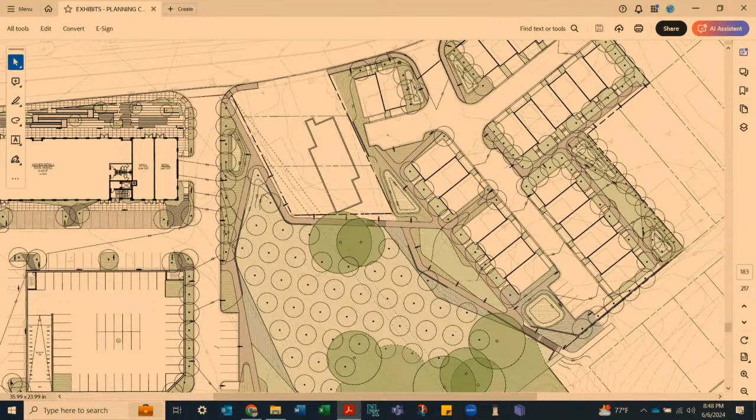So we had to go all the way up, and also for safety and security, you can see all the lights along it, but we're hugging the most gentle grade for people to walk back and forth, closer to some of the higher activity areas near the retail.

Over in these townhomes, there's a few pocket lawns nestled in the back, also looking over into the forest. Once this is all cleaned up and reestablished, there will be filtered views across the ravine, which will get blocked as the trees grow up and then open again in the future.

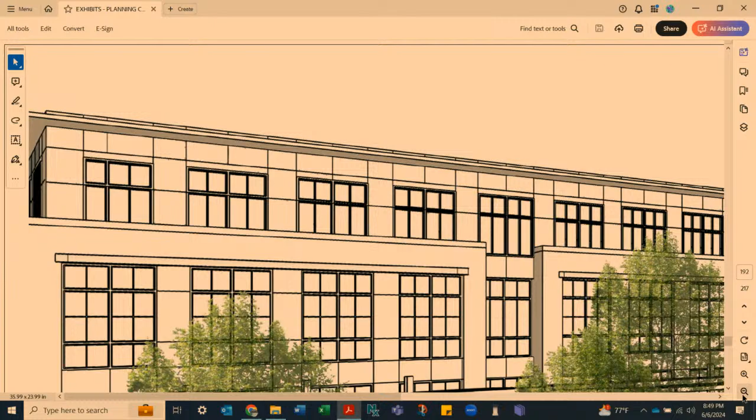Right now we've programmed it so there's a lot of opportunity for things such as boulders and logs being placed in careful ways, but also for play equipment to come along, as shown before.

Here's a little more detailed version of what we're imagining for the Forest Drive, nestling in the handicap ramp midway, having these intentional stairways to walk up, but then the rest of the stairs being a full 12 inches and 18 inches in area where they become seating as well. We're hoping there's success in slowing traffic by having people facing and sitting closer, and the hope is it makes people feel connected in the community.

Is there currently a bike lane right there where you're showing it? There's not a formal bike lane at all, there actually is enough space, but. So I'm just curious, are you proposing that bike lane? It came up in various meetings. Yeah, I think there's going to be a complete street with the bike lane.

Pretty dangerous area. Well, I think I ride through there all the time. I know one person who would do it. I ride there all the time and I feel completely safe.

It's sort of nice to have it there just as window dressing, and it's more of a placeholder because it doesn't really connect to anything yet. That's another story for another time, but the county has a lot of work to do on the other side of Old Solomon's Island Road. But anyway, it doesn't hurt to have it there, it certainly narrows the street a little bit. Yeah, a good placeholder.

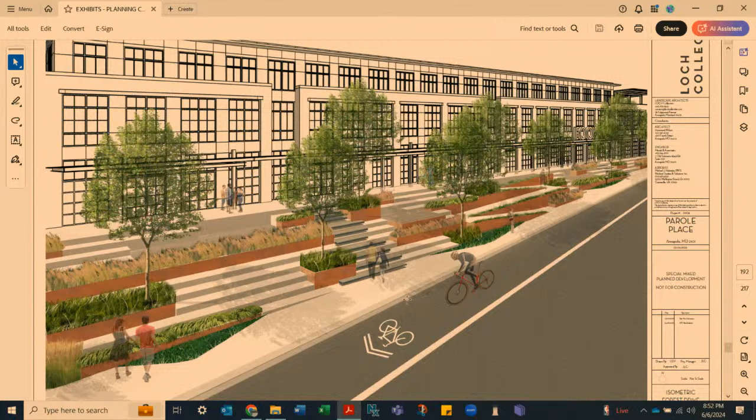Is Forest Drive there a city street, or is it? It's a mix, I think Mr. Meekins can probably answer that better. Or is it county? That's a very good question. Do you know off the top of your head? It could actually even be a state road, I don't think it has a number on it. I think Old Solomon's is state. Old Sol, yep, and then Forest up to right in front of our project is county, and then right past us is the city, going into the city.

So one thing we wanted to make sure to talk about, the paths became really important to us. We've kept them at a grade - we did a ton of grading studies amongst the team - keeping it so that people could comfortably walk across the site through these open areas into the retail, across the ravine over into the other townhomes.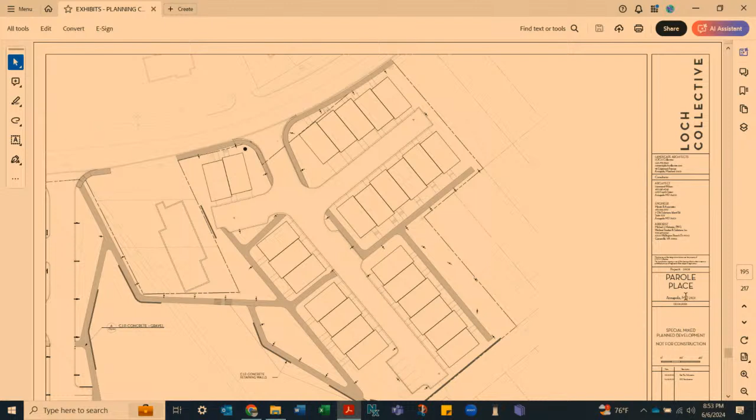We haven't shown any programmatic running trail, but there's a way to do a loop that doesn't involve any figure eights or looping back - a half-mile loop that kind of naturally occurs here. The hope would be that residents, or anyone coming to meet up, could do a quick jog with adequate markings and measurement on that.

One of the things we've talked about, you've probably seen this at parks, where they have the placard that shows the map - you are here, and here's the trail. If you walk it and come back you have a mile, go around twice. If you want to do a walking event on the weekend, some charity event, we've got a safe trail already built in, which I think is pretty unique - there probably aren't many other projects in the city, if any, that have delivered something like this.

I have a quick question. I don't have my own pointer - well, I'll just go like this, so you can read that.

So that's part of that Allen Drive connection - we are providing a pedestrian connection, but that requires permission. The connection would ultimately happen off... it says that where the stairs are gray, where that line is, that's our property line. So we can promise you tonight we can build that, but anything beyond that, we're going to need an easement from the owners of the Allen Hall apartments.

How's it going since it's been a few years and you were talking about it a few years ago? Yep, I think it's in the works. Were they a private agreement, and were they sort of not interested in making that a vehicular connection to Allen Drive? Well, the topography was prohibitive there. So you can't really connect those two? There's just too much grade change there.

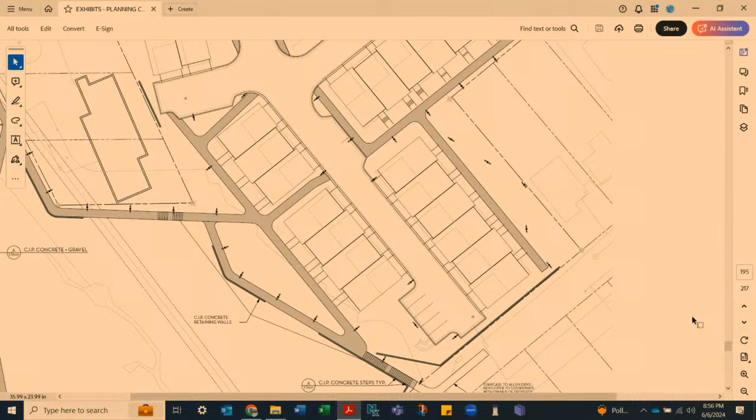So we really tied together the web of connecting here, connecting to the street, Forest Drive to head downtown, and then connecting to the neighborhood - I'm blanking on the first name, but the farm neighborhood. They have a quote-unquote lawn trail that goes behind down to the stormwater area. So all of those points really are connected, and our half-mile loop really could be extended a lot further.

Are there any paths in Neal Farms like that? It's been a while since I looked at it, but there's a lawn - you go around the buildings, and you can tell people walk it quite often. There are some packed mulch trails in the wooded area too, but we walked that probably a year or so ago. Yeah, they're there.

It would be nice if eventually all of these communities kind of knit together as one, so it's not this development, that development, but they all just sort of seem like one. Would be a nice goal to achieve.

You can see on the bottom right of the page, that is the connection to where, if we were walking that, if this existed, we'd walk off of that trail and walk down through the lawn. We obviously can't build off of there, but that heads right to their mulch trail that Stephen was just describing. So that's kind of our target, that you would just flow from there - you walked along the top of the hill, and it actually dips down into the forest and the ravine at a rather steep grade, but it does connect.

Let's talk about lighting. We provide safe lights across the whole site, so more traditional raised lighting throughout all the parking areas, both exterior along the streets and interior as well for all the housing.

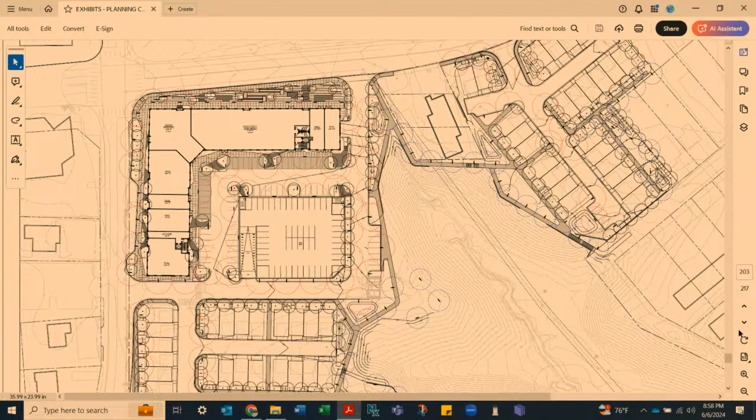And then the specific ones we've provided are smaller scale. Same style, just brought down in scale for the paths along the forest. Obviously, with a trail going through the woods at night, we really want that to be a safe point for whoever chooses to walk there.

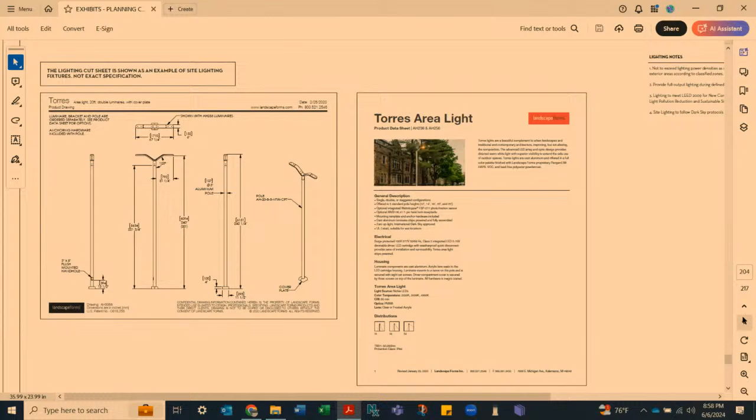Okay, let's talk about plantings - actual species, where, how many, and a little more detail on the street trees. We pulled some calculations that would be part of the formal process later, but just to go back on some existing site statistics: we have about 44% of the site existing that is quote-unquote forested. As we've looked at it, really it's a non-contributing forest - maybe you'd actually count 20% of that as active forest.

What is the term non-contributing forest - is that your own term, or is it from the Forest Conservation Act? It's actually a term the city has used very often throughout the years. So let's say you had a stand on a steep slope along the creek that was black locust - it's not really contributing to the overall forest character. They grew there because no one dealt with it for years. Right, so those are trees that are non-native and may be invasive species.

So you're just saying non-contributing, but you're not saying you're not counting them toward the forest conservation calculations? Yeah, we've calculated everything we needed to in those. It's non-contributing - we're not exempting them and saying we don't like those trees, so we won't count them. No, not at all. Gotcha. Yeah, but they're not helping the environment or really anyone, and we really want, as we said before, to kind of reverse this direction.

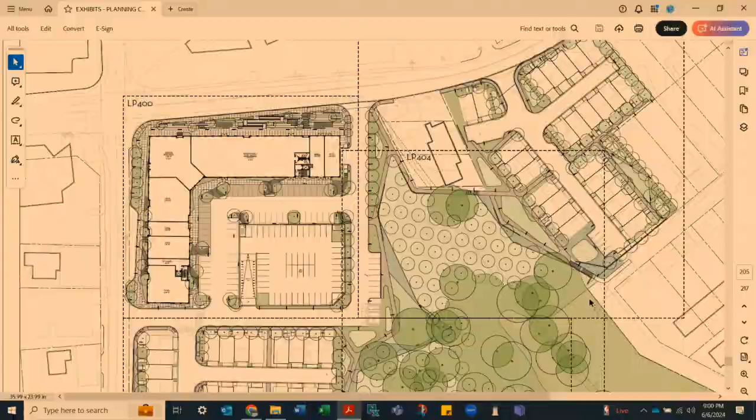With all of these trees, if we go by the 20-year diameter calculation, which is kind of the vision for Annapolis in increasing our forest cover as a city, we'd be up to about 86% by one calculation, and about 126% by another. So we have more than the required amount of trees, but we're going above and beyond to reestablish the forest that's there, bringing street trees around the buildings themselves - not that the architecture needs softening or the height brought down, because it's very much at the proper scale for where it is.

But these trees falling along Old Solomon's in clusters and into the forest in a skewed way really help soften the appearance of the built form against the trees. So overall, we have about a 4.5 acre existing forest, and we're proposing, with these street trees and everything, almost 9 acres of forest cover across the site.

Talking about the planting design, there were some questions - we're really going for this planting massing. Obviously we want aesthetic beauty where these people live, so it's lush plantings, some native, some non-native, but we're at about 80% native coverage around the buildings themselves. We're grouping these trees together to create shade. Just a reminder, we're reclaiming this landscape that essentially has a 0% biodiversity value.

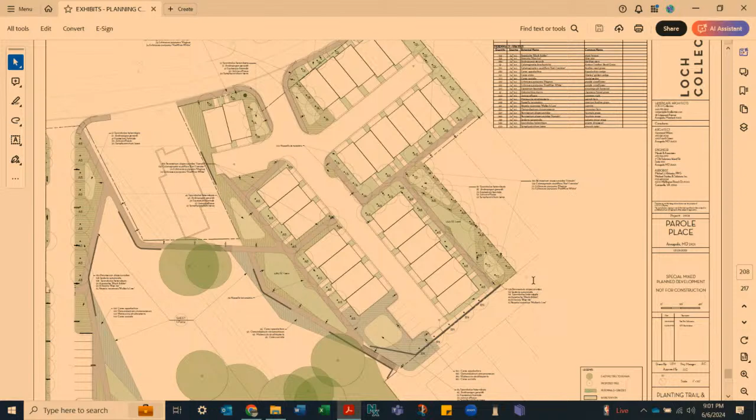We already touched on the meadow a bit, but I'm very excited about this idea of the meadow coming into this ravine. The olive green to the right of this image - we're not necessarily clearing that, it's probably the healthiest area of the forest coming into there, but the rest is where there are so many trees coming out. The kudzu is so rampant that it's going to leave bare ground when we're done, so we have to approach that - it's really a great opportunity to establish this new forest ground cover.

30 years down the road, there's going to be a healthy stand of trees, and so that whole planting typology is going to change, but this will help establish it for that time being.

Where's the meadow area you're talking about? So if you can see, pretty much everything except for that olive drab green on the right is all getting seeded meadow. It's over 2.5 acres in plan view, so really felt on the site it's about 3.5 acres given the slope. And so that gets seeded in a way that within the first growing season, it's fully covered.

Then it gets cut back about once a year and comes back, and we get it seeded again the second year. So what are you talking about for ground cover there, where you're going to be taking out the invasives? What kind of ground cover? Yeah, so the meadow mix, the way it works is the process we've done before is we typically walk the site.

We've done this about 5 times, and we'll gather any existing native species that we find naturally growing there, because it's a great sign - this is the right solar exposure, this is the right soil, what's actually happening. We take those. On this site, it's really hard because I thought you were just saying it's dead - it's all dead kudzu. So you're going to have to start from scratch.

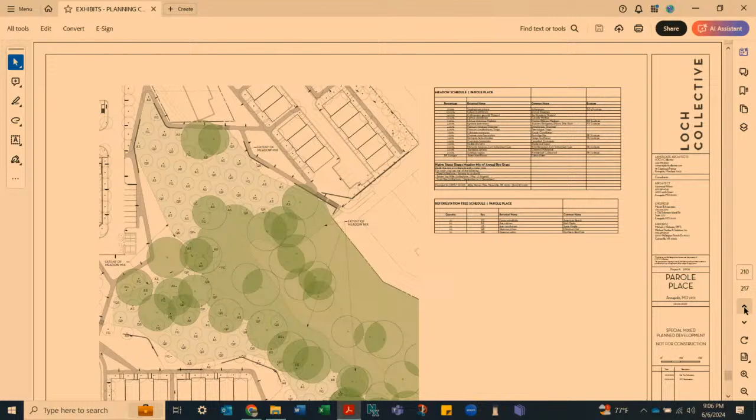And the only other thing I would say on the trees, it's shown in some of the details, which are sometimes harder to get into, but all the trees around the building and the main retail apartments are all getting connected by tree wells.

So they're not small islands of balled up roots, but able to connect to one another and have broader availability of soil. Silvacells were mentioned - are you committed to using them, especially where roots need to spread out without pulling up sidewalks? Yeah, there's both. We have decking that connects some of it, allowing soil to go between them. We use a broad range of products. Silvacells is one option. There's so many products now - we love silvacells, we love Jim Urban, who's been here for years, but there's a lot of options we can use. We left it open.

Thank you. And just generally, can you confirm that the project's high-quality landscape design is in compliance with all the code standards? We can. I'd say the applicant isn't just throwing high-end materials at this, but carefully thinking about materials, whether bluestone or how concrete's used, the wood decking that really matches the city character and blends in. We're doing that in a way that has high aesthetic value and hopefully connects into the rest of the community. Thank you.

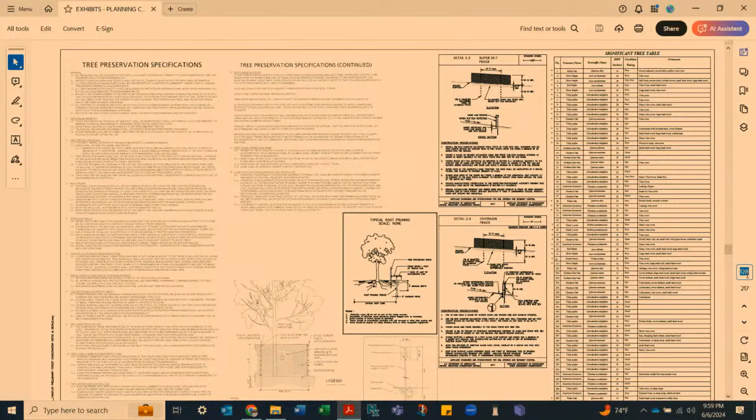Sorry, do we have a—let me just go back to that. Yeah, stands, I can use that. Are you able to zoom in? Yep.

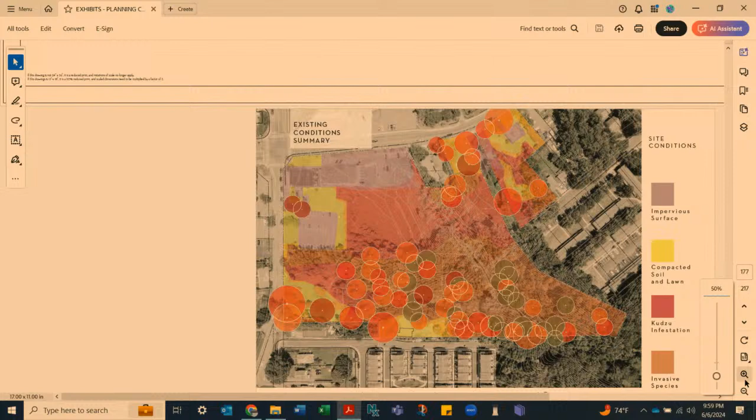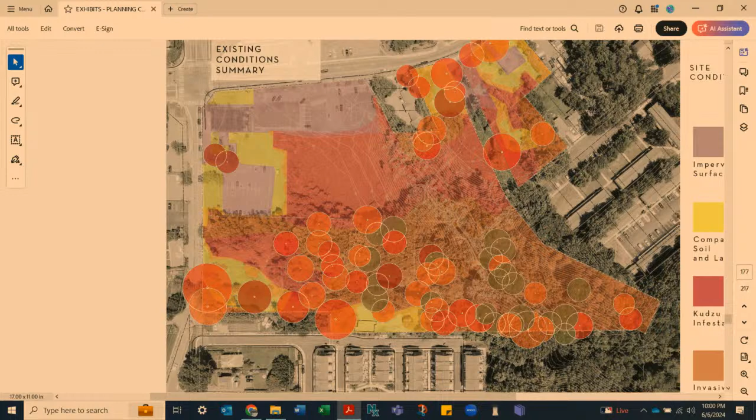If you see the forest off to the left edge of the photo that scoots in and butts up to Old Solomon's Island Road, that is stand 1, and it generally extends down along the southern end toward the existing townhomes by Neal Farm. That stand is 1.15 acres in size. It's an early successional stand with a tremendous amount of invasive species covering it, upwards of over 80%. It generally lacks significant environmental features—it doesn't have any steep slopes, and it does not contain any significant trees. It's important to note that back in 2015, when I did my original forest stand delineation study, the stand was actually 1.34 acres in size. But because of the extensive invasive vine cover covering the trees and killing them, the stand has reduced in size by 0.2 of an acre in the last 10 years along its southern edge. It also contains a fair amount of trash, and because of its high invasive species cover and low percentage of native species, it's a low priority for retention.

The second stand, stand 2, is comprised of 3 substands. A substand is the same type of forest community, but it's just not contiguous—so there are 3 pockets of forest essentially made up of the same species. Two of them are on the left side of the ravine, and the third is on the right side, generally following along the steep slopes of the ravine. That comprises stand 2. You'll find yellow poplar, large oaks like northern red and chestnut oak, sycamore, and sweet gum here. The kudzu stand actually crosses a portion of this stand, but because it contains significant environmental features such as steep slopes, significant trees, and stream buffers, it is rated high priority for retention.

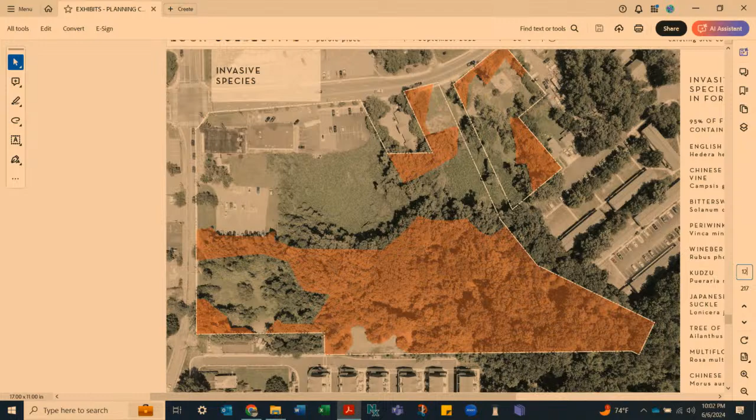So do you think you could prepare a sheet for next time that actually illustrates the stands? Yeah, that would be really helpful. I have the FSD, I'll bring it. Okay.

Yep, sorry, go ahead. Let me get to the forest conservation—just want to get... seven, yep, I just want to get the right sheet here. 124.

All right. So the last point we're going to make with Mr. Klobasco and then close out with Mr. Harrison is our variance request to remove those 14 significant trees.

Well, I'll let Mr. Klobasco go through them, but could you just identify them and then we'll go through the criteria.

So before we do that, I have a question for staff. So there's sort of two parts to this forest conservation piece with respect to variances. The first is that the department makes a determination that a variance is warranted here, after working with the applicant to look at how the ideas for forest retention have been exhausted, resulting in the need for a variance. So before you start working through the second piece that has the criteria for the variance, I'd like to ask staff to talk a little bit about the history of how you determined that a variance was required.

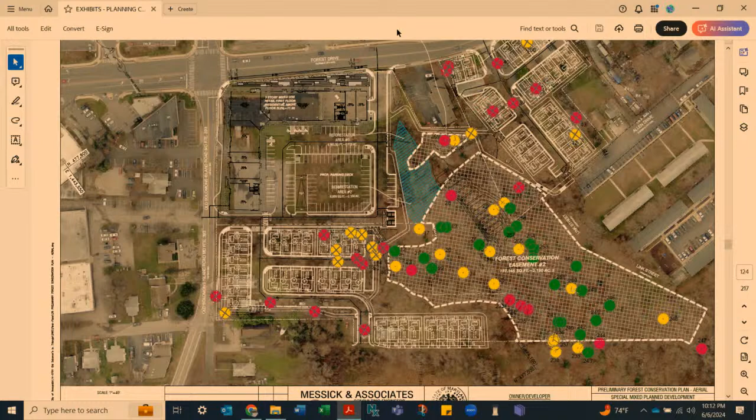The 14 remaining trees that do require a variance, they're 30 inches and greater in size, and would require a variance as well, because it's required under state law as well.

Of the 14 trees that require a variance for removal, 10 of those trees are in poor or worse condition and generally in declining health, and do not warrant preservation. The other 4 trees, 11, 29, 37, and 260, are rated in fair condition, but are adversely affected by existing vine cover or have been subjected to overhead power line pruning. None of the 4 trees listed in fair condition are of suitable quality to warrant preservation.

In addition, tree 29 is located within the footprint of the proposed step-pool conveyance system, as well as within the city's existing sewer easement area, and cannot be preserved.

So hitting on the variance criteria, could you describe the special conditions peculiar to the property which cause this unwarranted hardship? Sure. First, this is a relatively small site that contains 73 significant trees, which are widely scattered throughout the property. Avoidance of all these trees would prevent any reasonable use of the property for which it is currently zoned.

Furthermore, preservation of the 14 significant trees proposed for removal would also cause an unwarranted hardship through a significant loss of connected developable area. In an effort to preserve as much of the existing forest on the site, particularly those forested areas within sensitive habitats such as steep slopes, the intermittent stream, and contiguous wetlands, development has been concentrated along the existing road frontage and developed areas of the site.